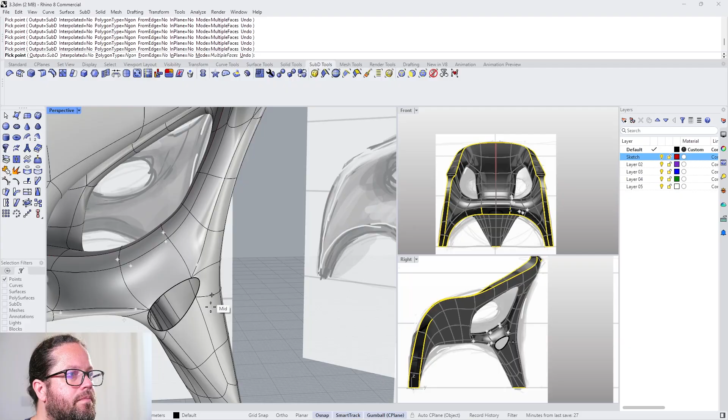Now, in this video, we will look at how we can close any open surfaces on our SubD model and how to refine the model using the smooth tool. We will learn how we can smooth the entire object, but also portions of it. And we will fine tune the model, and then further subdivide it to make a very detailed model, which we can then use in any other 3D software, render engine, whatever you want to use. But before we jump in, a quick shout out to Kevin Johnson.

Now, I will jump back into Rhino, into the final video for the SubD Chair Masterclass.

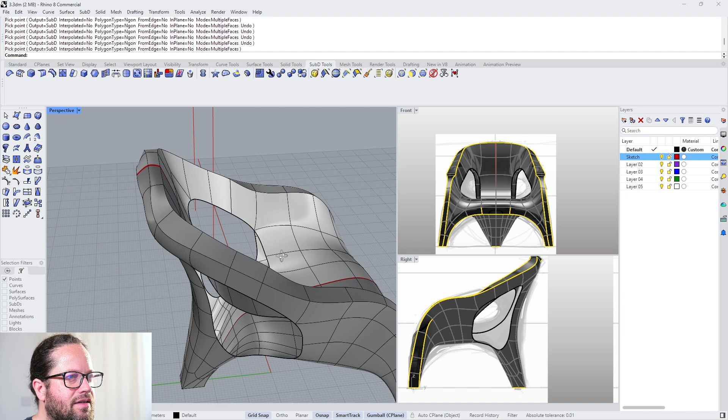Alright, that's where we ended up in the last video. And now we have two options here. We can either close both sides, close these holes on both sides from inside and outside, or we merge inside and outside, so it is more like in the sketch. And I want to keep that because I felt like this was quite unique. It also creates a few more challenges, which allows us to learn a bit more.

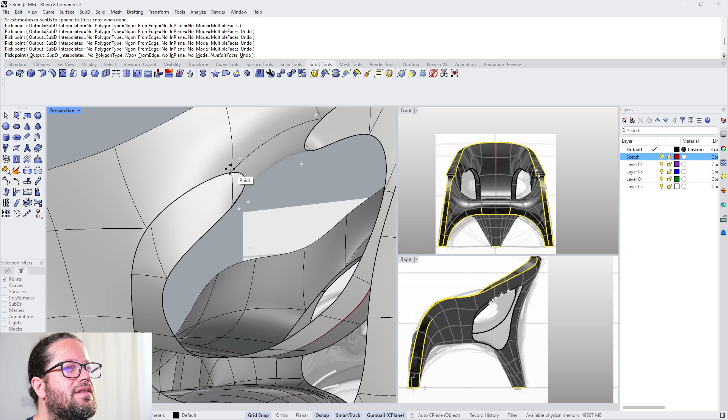All right, let's try this. Append - by the way, I always would hope that Rhino would make custom shortcuts more available. It's not really that straightforward. In Blender, for example, you have much better shortcuts. It's just so more accessible, and much more economic to work with, especially with this SubD modeling. Often you just need to tap one key on your keyboard and you have the command ready, and that's kind of what I miss in Rhino.

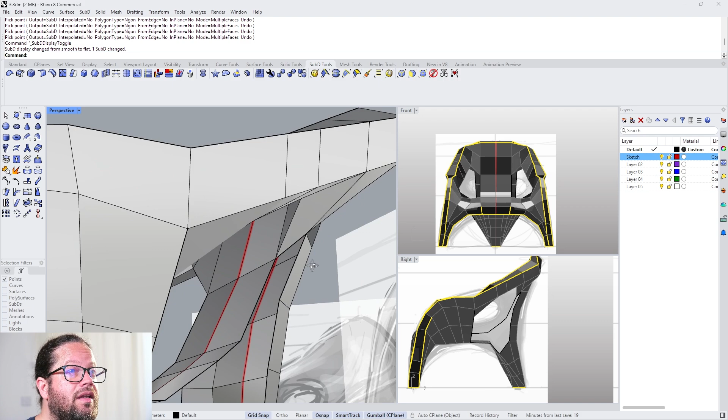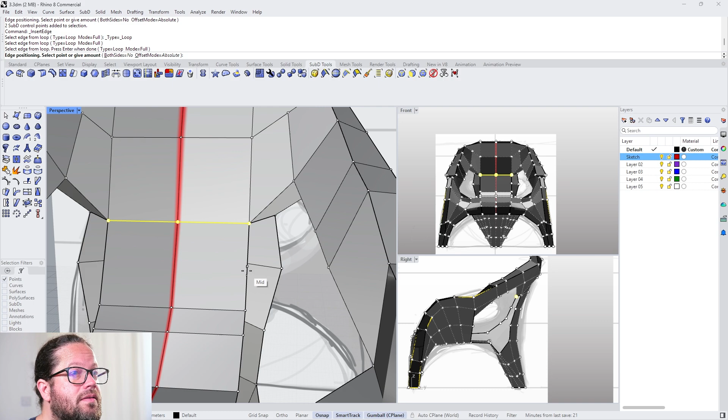Okay, let's see where we are. Here it's gonna be really tricky, I think. All right, okay, we can continue. Append. It's very pinchy here, but we can later clean everything up, make everything a bit more palatable, and we can even do a bit of cleaning now. I will also explain a bit more about the Gumball and the different modes, because this is not the only way to work with the Gumball. There's other ways. Here probably can have another division. No, that's not what I want. You can do it like this, midpoint, and yes, okay.

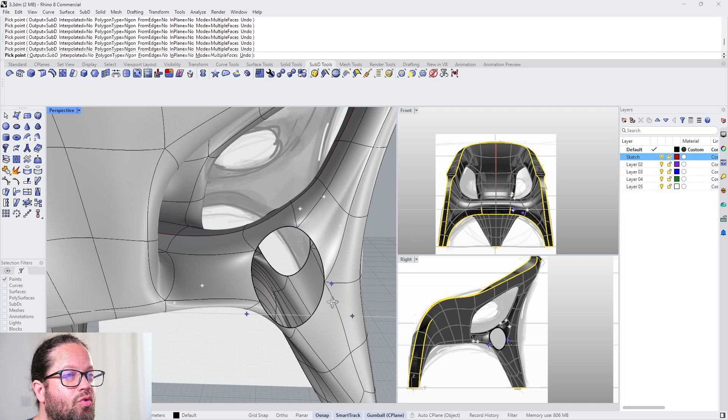So now we can close this here. Okay, we can close this. Here we need to be really careful. All right, let's try this. It becomes a bit tricky here, I think. Then we have this one. Here's quite flat, it's a bit strange. And here we have too many. Maybe let's do this, and then we have this pinch point.

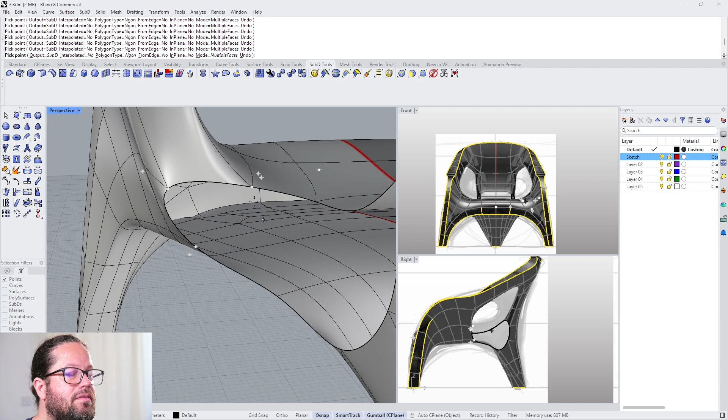What are we gonna do? Sometimes... oh no. Oh, that's what I really don't like, that you're gonna lose this if you don't confirm. It's super annoying, it's like, come on. And then this doesn't work here. Okay, confirm. I think we need another edge loop here, so then we are creating more points. Let's try that, so confirm.

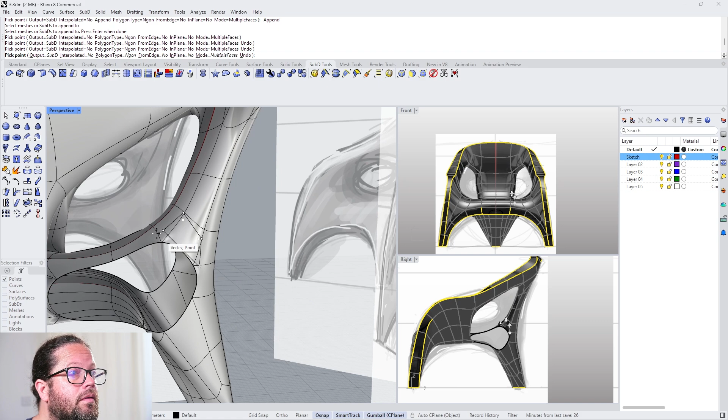All right, okay, append. Becomes super flat here, but we can fix it, I hope. Yes, that was actually not so difficult, not as difficult as I thought. Just need to add one more of these edge loops and we're good to go. It just doesn't look very nice at the moment, I feel.

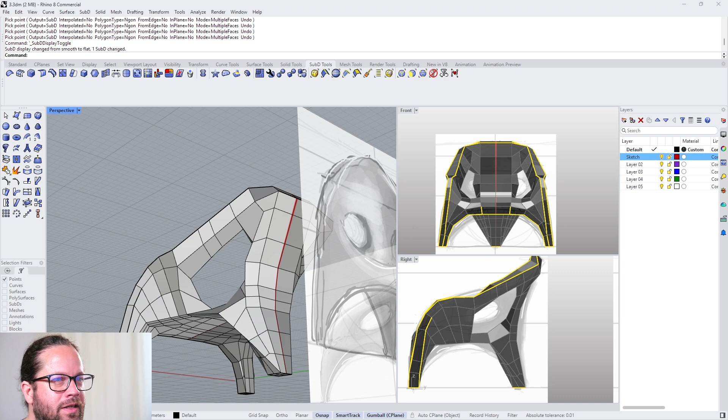Okay, let's look at this in the hard edge mode. So we closed the hole, but now we need to make sure that this actually makes sense in terms of the distribution of the different points. What we can do is, the cool thing about these hard seams is that they don't move even though we use the smooth function. So we can smooth out areas or the whole object. Let's have a look how that works.

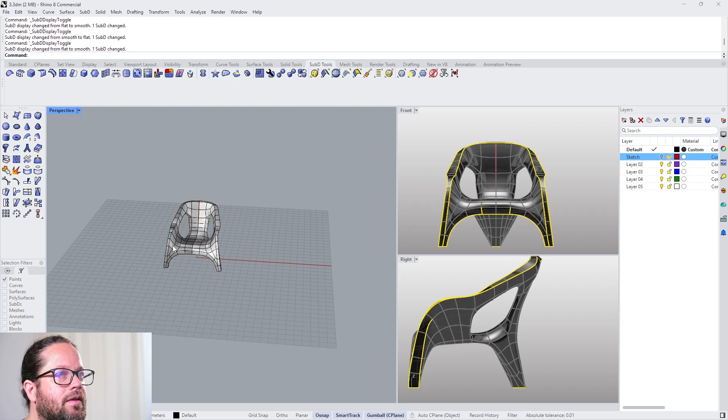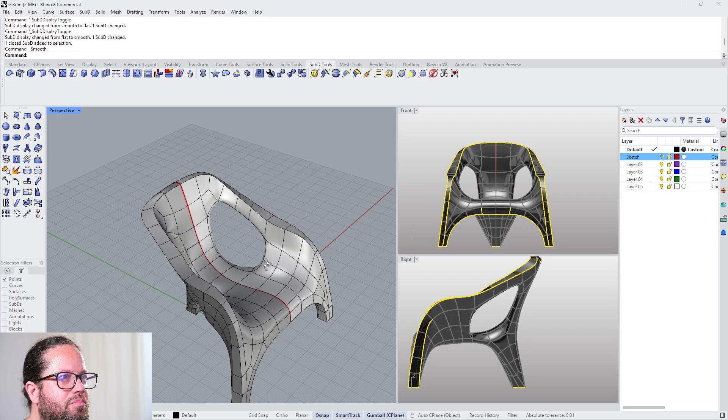So we can select everything and try the smooth function. The smooth function will kind of distribute the points more evenly, as you can see, but it's not changing these hard corners, which is very useful. So it already looks a bit better. These holes are bigger than I wanted, but I feel like it's appropriate.

Anyway, let's check a bit more. We need to clean up this a bit here, and I will make this. I will just work in the hard edge mode at the moment.

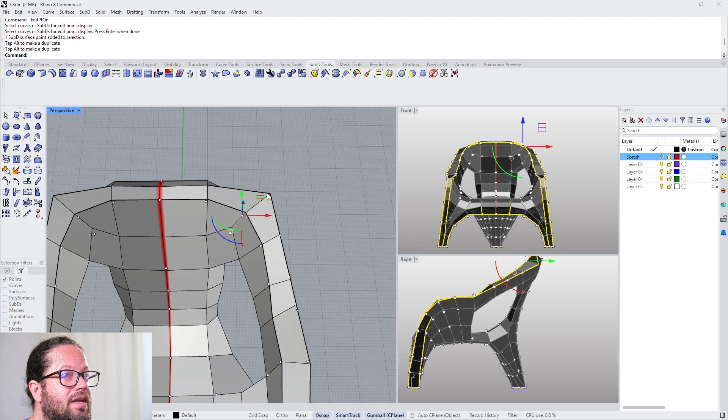We'll turn on the points and make sure this is better distributed overall. I don't know why this is not showing. I can go into the top. Now it would be nice to have actually a top view. So we could go here and set view. I can put here the perspective.

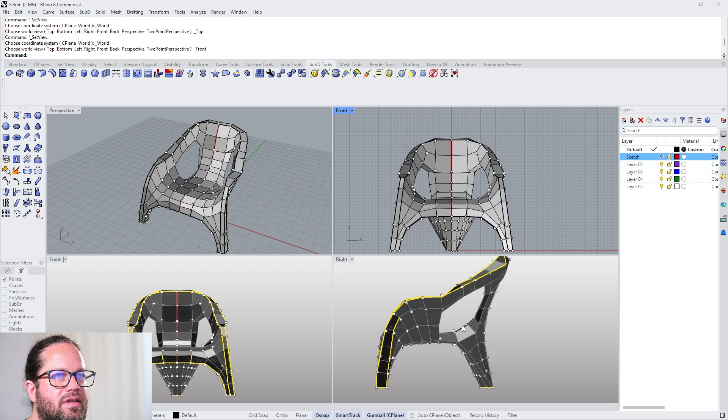That was also useful, shaded. Okay, and then here we're gonna put top. No, here I actually want to have the front view. So these are aligned, and then here we have top. Okay, because then I can work directly in here.

I want to make sure this is way more evenly distributed, so it looks cool from all sides. Here there's something wrong with this edge seam.

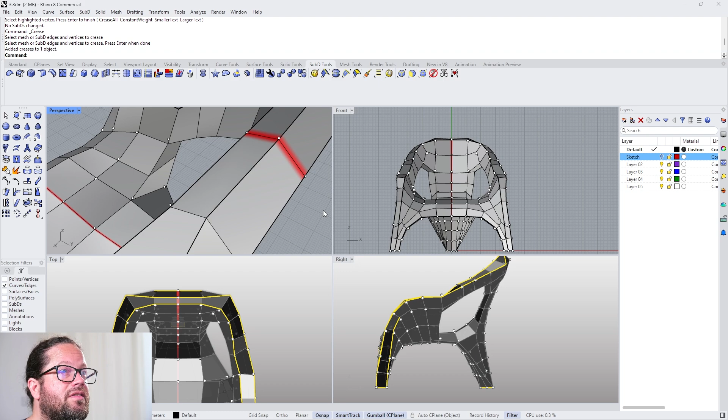So I'll go here to curves. I'll make this a seam. Oops, this was not what I want. So it's called crease, not seam actually. Okay, and here we're gonna get rid of it. Yes, that's what I want. So it feels more consistent.

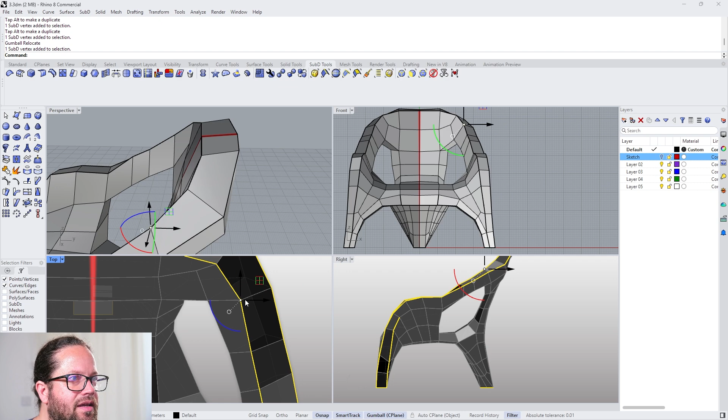Now I can go here and push these back. Actually it's sometimes better to work in the hard edge mode, because there you can really see where it's not correctly distributed yet. I can see that here it could be more rounded. If you fix the hard edge mode points, then it automatically looks good later on. Okay, making sure that it's all distributed evenly and to each other.

This doesn't feel right at all. So we're gonna potentially, I could add another loop here inside. That could be an option. We can also select edge loops like this and then modify the whole thing.

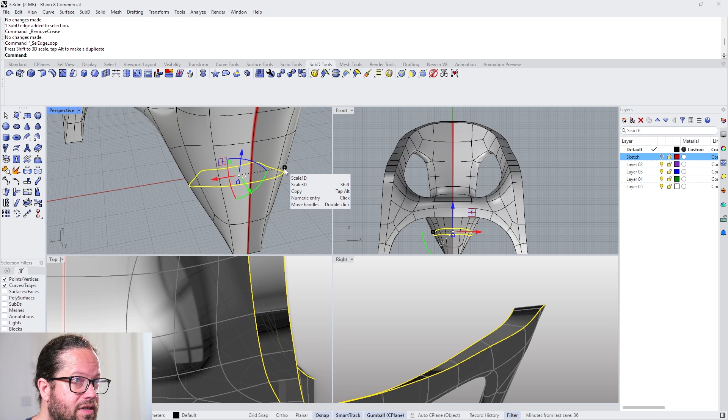In that case, if I want to make this thinner, I can just grab here this. So actually you can see already what it does. So you can either scale 1D or 3D by shift. If you press now shift, it scales everything 3D. It's a bit weird, that was not what I wanted.

Or just 2D, that's also possible. You do the same here. And we can also smooth out portions of the object or of this seat. So for example, I could go here and only smooth out this selection here, and that would make everything a bit nicer. So let's do the same here.

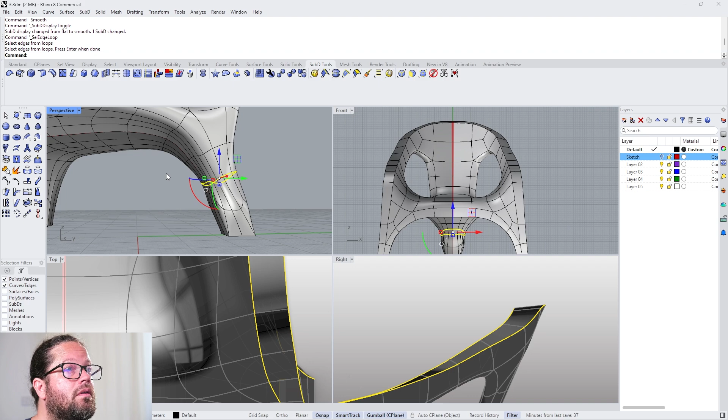We could even take the whole thing, that's also possible. We could use the select brush. Yeah, that was not ideal, but you get the point. Now let's see if we can only, I could only select all the points and smooth that out if I want and see where it goes.

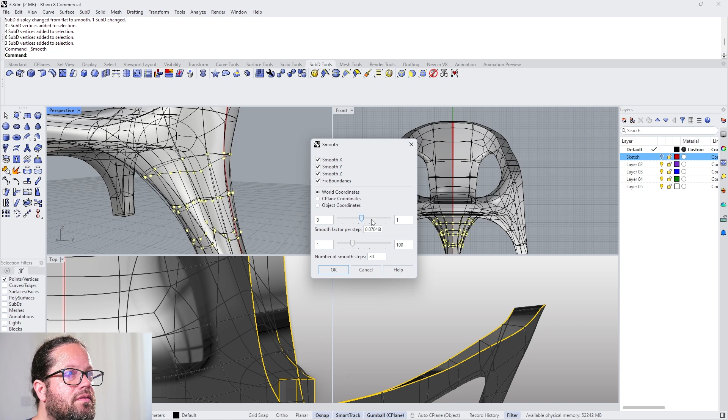Okay, this feels much better. Also looks better from the back. Yeah, I could try also this portion here. I'm not happy with this portion here. I would like to have this edge a bit more prominent here.

Okay, let's first work on this. I just want to add this. By the way, I would not need to select everything on each side. Actually, I just need to select one. I could select just one side, and selecting this here actually doesn't make any sense because that is on the mirrored side. So I would need to add this here.

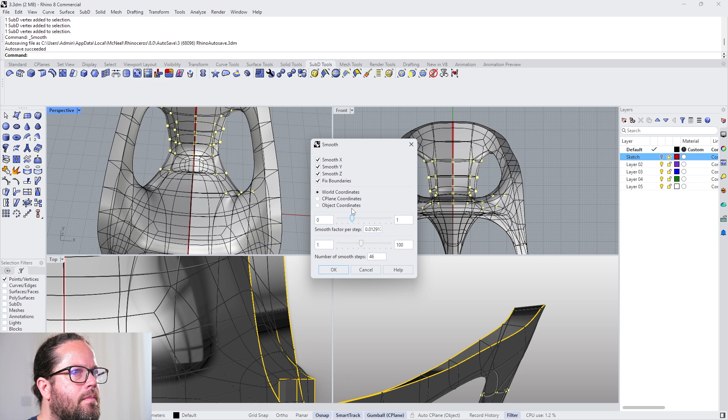That was not good because it's also, I get rid of these maybe in the middle. Don't need this really. Okay, so let's try this again.

It's cool, but actually I don't want this to become too thin. Let's go back here. It was more about the distribution between these few points here. This also doesn't look so great here. This should be more like this.

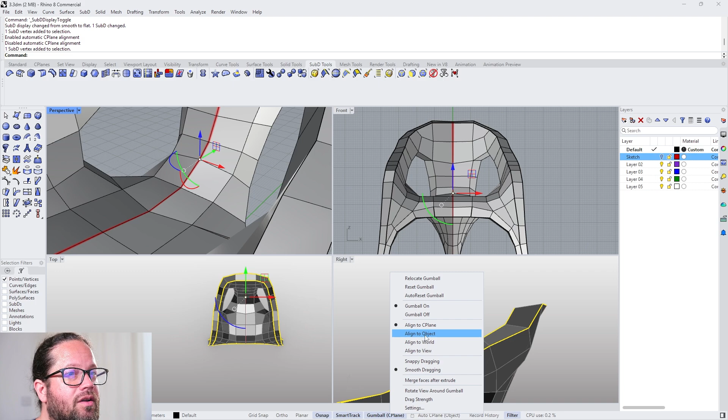Now, one very important aspect here as well, I haven't really touched on that, but in the Gumball setting, the Gumball is not just this tool as you see it here. It can be adjusted to do different things. So you can align it to, for example, the C-plane, to the object, the world, and the view, which is really, really important. If I go here on object, then you can see it now changed to the orientation of the object which is selected.

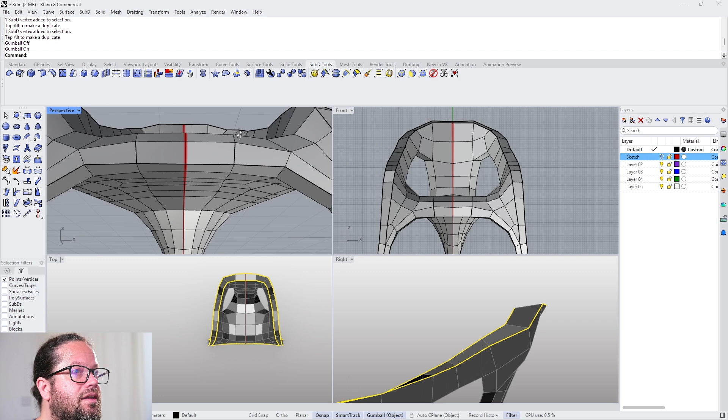I can just now see here, by the way, I have another seam which I don't want. So I will select this and unseam it. Now sometimes if I choose both points here, it becomes a bit weird. I can go back to my C-plane or world coordinates and pull this.

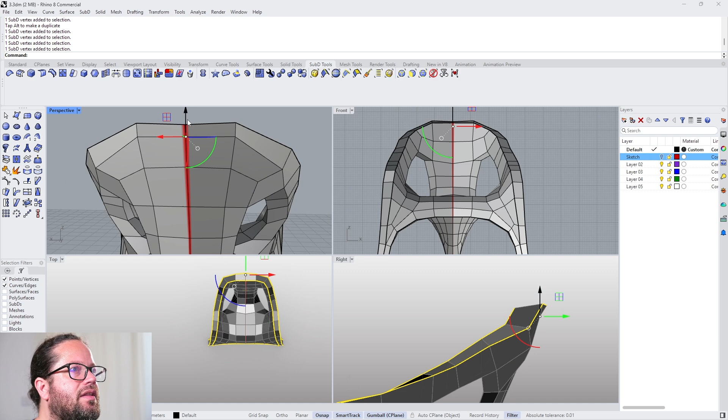It's also okay. Here it's very thin, so I will just pull this back a bit. Yeah, this doesn't feel right either. It's okay if this becomes a bit more bulky. And it's always good to switch to hard edge mode to see where the problems are.

And then you can of course smooth this again if you want. Sometimes the Gumball is really annoying here, so you can turn it off. Also, you can turn off certain coordinates and smooth only in a certain direction. That's probably quite useful in that case.

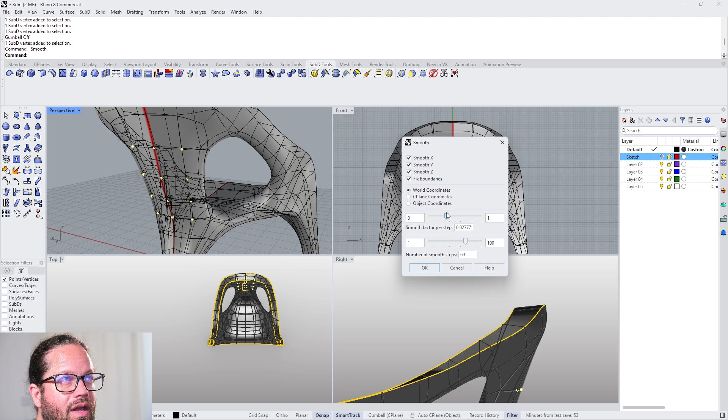But yeah, I think this feels much better and I think I'm more or less done. Now, of course, you can play around forever with this. But yeah, I think it's quite nice, quite a unique model also.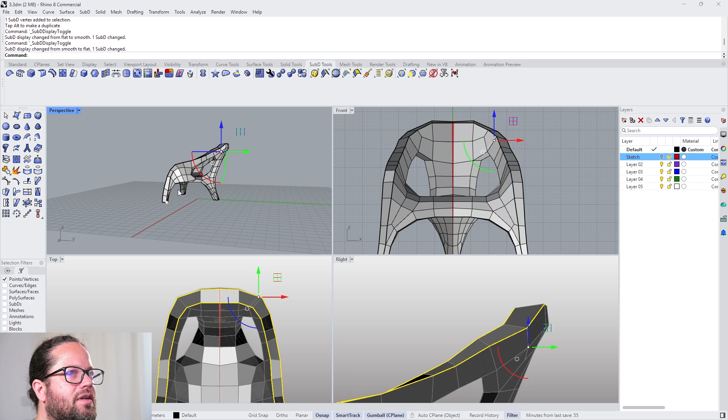Let's see, there's a few points which I'm not happy with yet. This portion here is also not really ideal, I think. There's, of course, always room for improvement. Here, this doesn't feel right at all, so I would probably push this out here. Yeah, that feels better. Again, you could play forever.

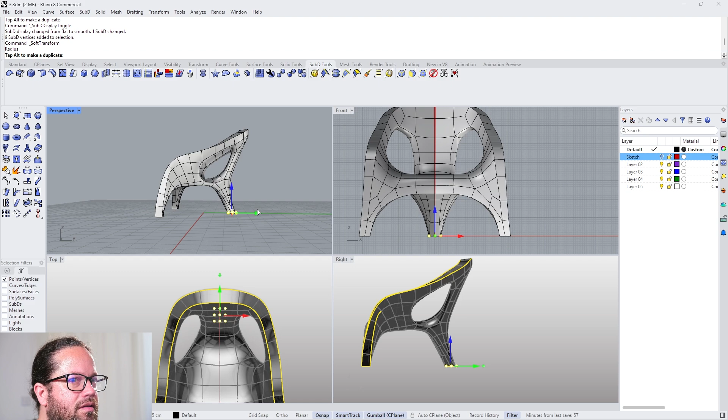Now let's check a last time on each side. I think it's quite interesting. And of course we can still play around with this and, for example, push this, make some more micro adjustments and see if we need to push a bit more. Maybe this needs to come in or out more. Maybe this whole thing needs to be more like this.

So I'm thinking maybe I should draw a clipping plane and just make a last final check and see how that looks. Actually that's a really cool animation, I could use this as an animation. All right, anyway, I can talk about animation another time.

Now, if you are happy with this, you can also make it more resolution, as I did in my intro animation. Just to be clear, I did the intro animation in Blender, just because I'm more familiar with the render engine there. It's more straightforward. But if you have V-Ray or any other render engine, probably any of these can do a decent job. Every render engine has its pros and cons for sure.

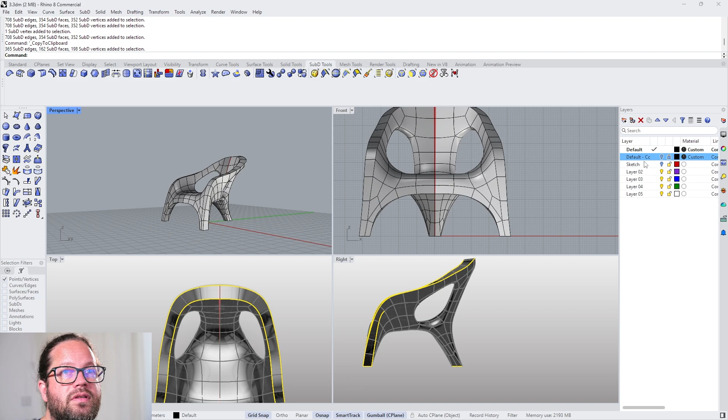Then you get a much more detailed model, and you can of course do that not just once but twice, and that creates a very smooth 3D model, like a mesh model.

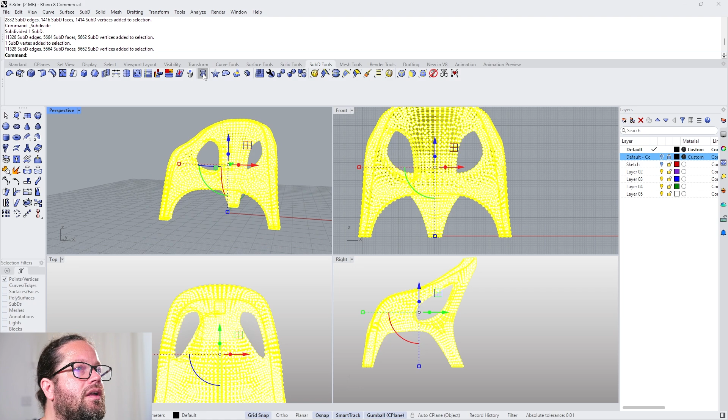You can also then, I don't know, then yes, I forgot about that. So then you can remove the SubD symmetry. So if I go here and remove, then I have one object, and then you could change things on one side only, for an asymmetric chair. You know, this was the first step.

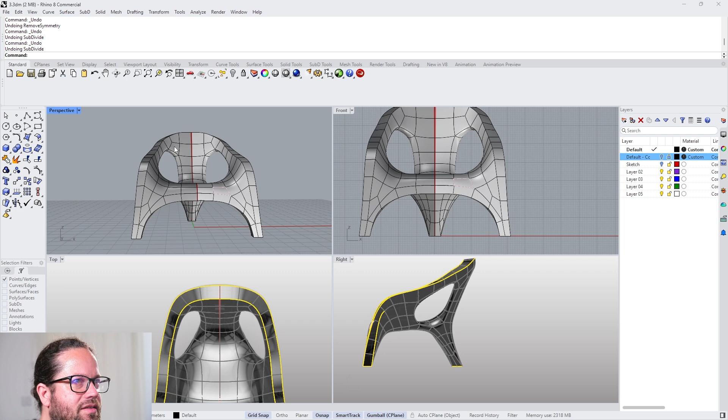This is our model, second subdivision, and third one. And then we could have done this differently: we could have said remove subdivision, then remove the mirror, and then add our subdivision. It's the same either way.

So I think this is pretty cool. In the next series I will cover SubD modeling, and we will use Grasshopper and SubD. I'm already looking forward to this.

All right, I think that's it. I hope you like this video. In the next upcoming videos, I will explain SubD modeling again, but we will use SubD and Grasshopper, and I'm super excited about this. This could be quite interesting. I haven't seen any tutorial about SubD and Grasshopper together, and that could be quite amazing.